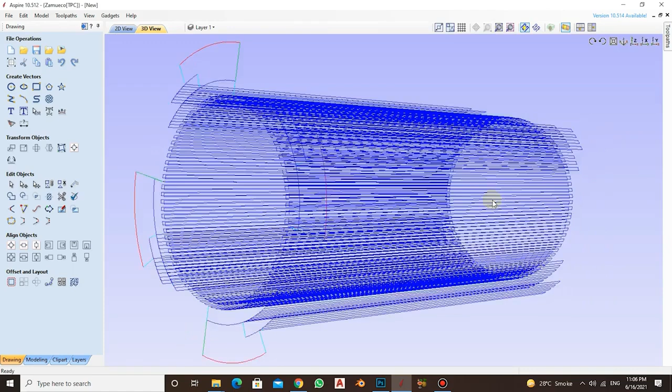Today, Aspire brings you another new tutorial, and as you know, we started a series on rotary, so this is another new tutorial in that series.

In today's tutorial, we're going to cover something very important. Whenever we take any raw material and start working on it with the rotary, the very first thing we need is to make that material normal or raw.

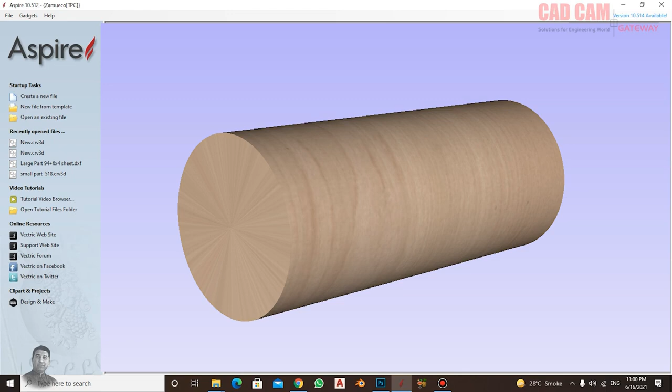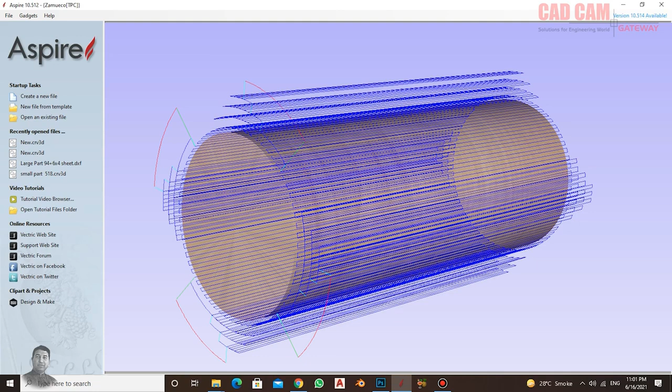Let's start with a new file. Here I have taken a new file with a length of 12 inches and a diameter of 5 inches.

Here you have already set up the rotary slate and the rest of the settings. Once you click OK, these two lines that appear by default in the rotary will become active here.

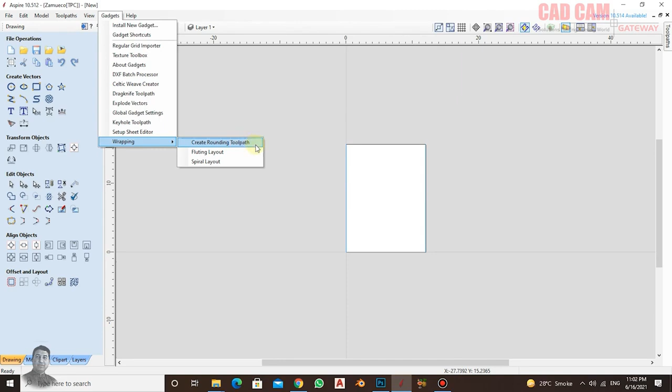After that, in the gadget section, we have the option for wrapping. When you select this, you'll see that we have two main options here in the rounding toolpath. The first option is blank size and shape, where you set the size of the square blank.

That means we have to work on a square blank. So what will the square blank be? I set its size to 5.25, just a little extra so we get good tooling.

After that, the second option we have is the diameter of the round blank. That was the square blank, and this is the diameter. If it's a round blank, you can also set its size as you like. I want to work on this one first, while the size of our job is 5.

So after clicking on this, if it's a blank, you can set its size as you wish. I'll work on this one first. Your square blank is 5.25, while our job is 5.

After clicking this, I'll tell you more about the features. First, there are two options. You can choose this or that, meaning it will be a square blank. A blank is the raw material you mount on the machine.

When you have to do turning, how much allowance do you want to leave on it? If you want to leave some allowance first so that whatever further work you do is done on top of that, or if you want to do roughing and then use the finishing tool later, you can adjust those settings here as well. So here we look at the machining method.

We have two options above, and for both of them, there are machining options available below. In the machining method, we have raster along cylinder, and third, we have optimized raster along cylinder, square blank only. This third option is only used for square blanks, which we have selected here.

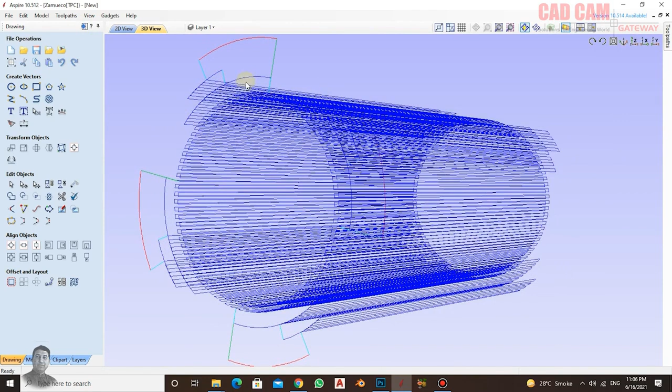If you look at it in 3D view, it has generated a preview of the toolpath here. First, it cut this area, then it cut here, and after that, it cut the whole thing. First cutting all 4 corners, and then, in 2 steps, it completed the size on top.

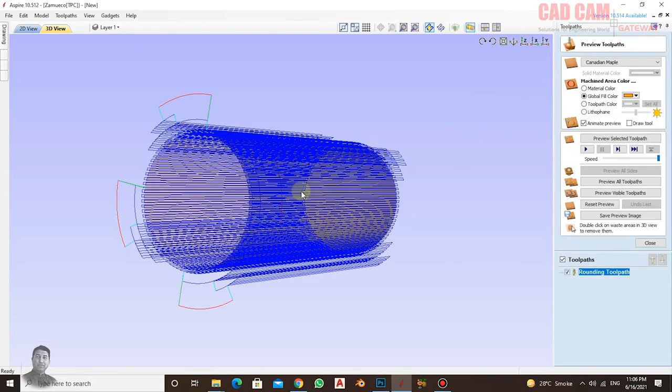Now, if I come here to the tool database, to the toolpath database, and take a look, you won't find that feature here because there's no animation.

There's no simulation animation in this, it just simply moves forward like this. Also, you can't do editing here. But if you want to edit it, it's not a big deal. Suppose I delete it from here.

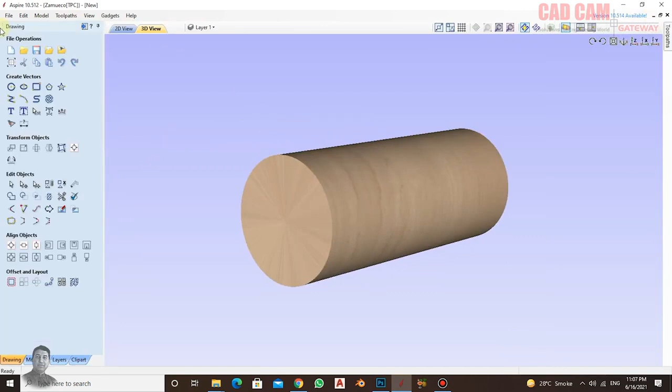I just deleted it. Now, if you go back to 2D, come to the 2D view, select this position again, then go to Gadgets, then to Wrapping, and here you can go to Rounding. As soon as you turn on the toolpath, the same information I'm bringing here, where it says end mill instead of end mill 6, I'm putting in an end mill 12, a half-inch end mill, so that the roughing process goes faster.

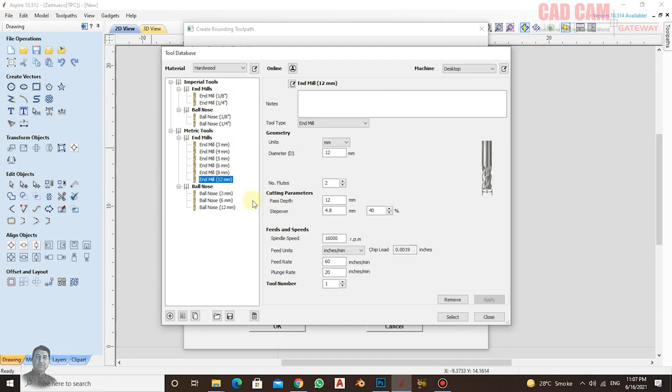You can set it in metric or in inches, whichever you prefer. Here we have end mills up to 12, and you can add more end mills if you want. So now, using a 12 millimeter end mill, I'll select it, and see, I haven't left any margin for its size here, meaning I haven't left any allowance, and I've set this size.

Click OK. After clicking OK, as soon as you come into the tool database, you'll see a preview has been created here. If I look at it in 3D, you'll see it's already made a view here. So after resetting it, no margin or allowance for size here. I set this size. Click OK. After clicking OK, entering the tool database, a preview is created. In 3D, a view is made.

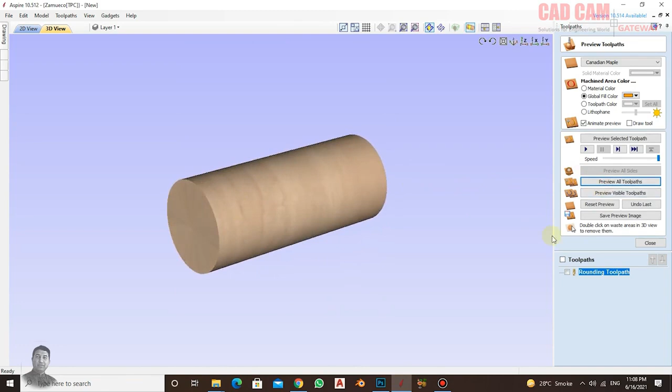Resetting and previewing again straightens it, then gives a round shape. To see the tool view, the toolpath, the one it just created, you'll have to select it. So viewers, this was a large square blank that we did the roughing on.

If at this same spot I delete it in the toolpath, I delete it because I don't need it for now, then I'll come here to Gadgets, go to Wrapping, and when I select Create a Rounding Toolpath here, now I'll tell it, because as we just saw in the preview, we already have a round diameter created. This, the blank we're using, is round, so I'll set it to 5.125, giving it 1/8th overage.

We have two options for this. I'll select Radial. In Radial, the tool will move around its circumference, creating a toolpath around it and cutting it, starting from one side and going around to the other, making a round path. Here, I used a 12 millimeter end mill for it.

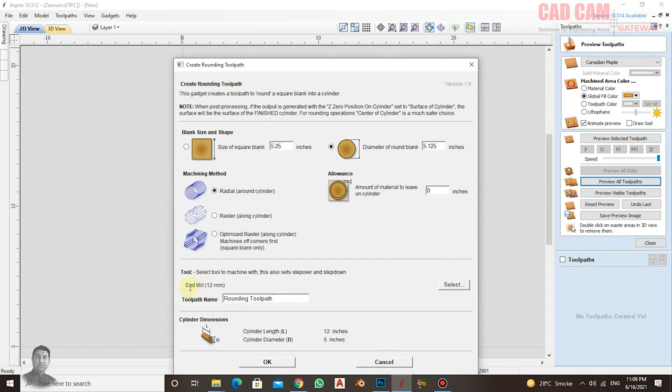Click OK, and a toolpath is generated. If we come to 3D, you can see here. Look, I simply clicked on Preview here, and it gave this preview. That means it has now made it round, and the size you specified there, it has generated that diameter as well. Now, on top of that, I used a 12 millimeter end mill.

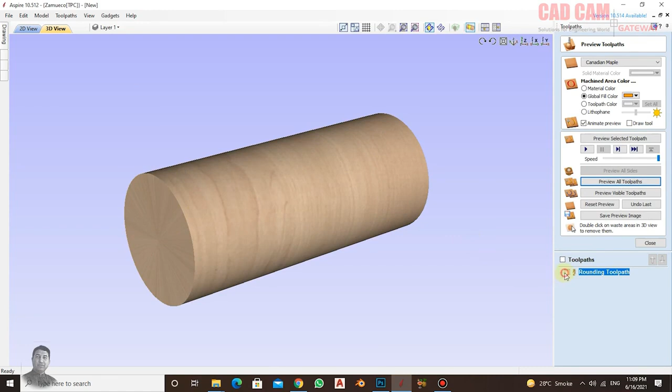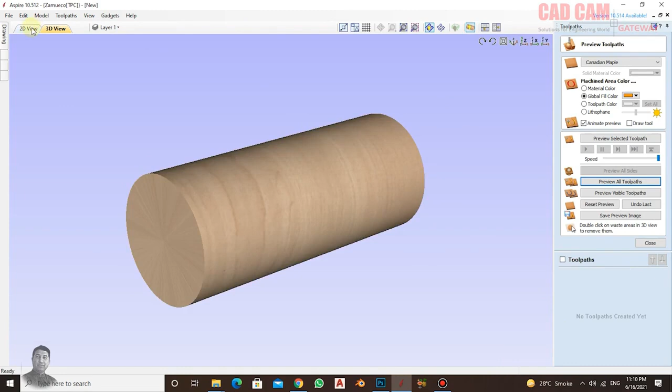Click OK, and a toolpath is generated. In 3D, you can see I simply clicked Preview, and it gave this preview. It's now rounded, and the specified size generated that diameter. The toolpath created on top came out round. Based on diameter and step over, the tool's diameter is the step over, so it creates a toolpath and cuts it. I'll delete this toolpath.

Next, let's look at the next option. Go to 2D, then Gadgets, then Wrapping, then Create Rounding Toolpath. We'll use Raster along Cylinder. I use Diameter Round Blank, and for Raster, click OK. As soon as you click OK, another toolpath generated. In 3D view, the raster created a toolpath used for roughing.

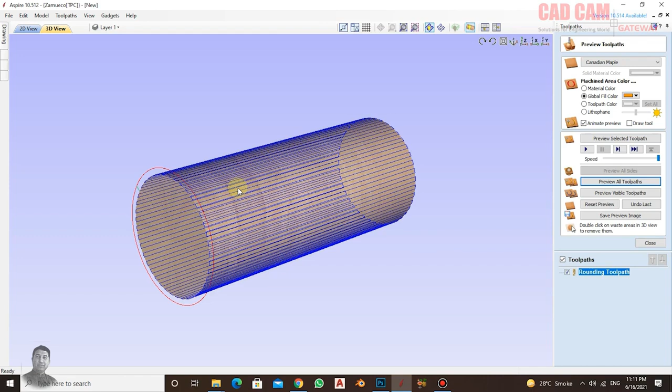An end mill can smooth it. For 3D design, a ball nose is needed. Aspire provides these tools. Manually designing these calculations and toolpaths would be too tough to handle. Aspire provides these gadgets. If we had to manually design these calculations and toolpaths, it would be difficult.

It hasn't shown us anything. It has its own plugin. This gadget generates toolpaths itself. If we had to do this work ourselves, then it would have been very difficult.

In the same way, the three features we discussed today, I hope you understood these features and that they were helpful to you. If we talk about what comes next, you have to save the toolpath, and the process is exactly the same as what you used before. You need to use your required post-processor and then save the toolpath.